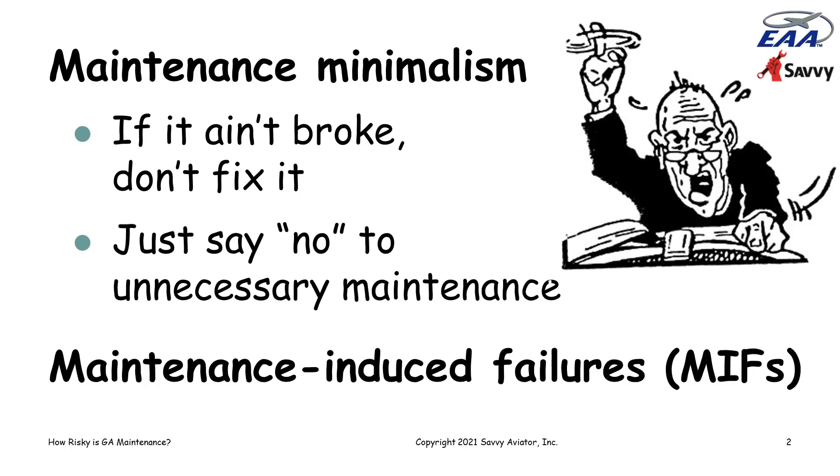But the question always comes up: just how risky is maintenance? How often do maintenance-induced failures occur? How often do they cause accidents? How serious are the consequences? And there have been a lot of studies on this, and over the years I've sort of wet my finger, stuck it up in the air, kind of averaged all the things that I've read, and come up with the

following general breakdown: accidents are roughly 75% caused by the pilot, about 12.5%, about 1/8, caused by the machine, and about another 1/8 caused by something that a mechanic did or failed to do that caused the accident. These are very rough ballpark numbers that I've come up with over the years.

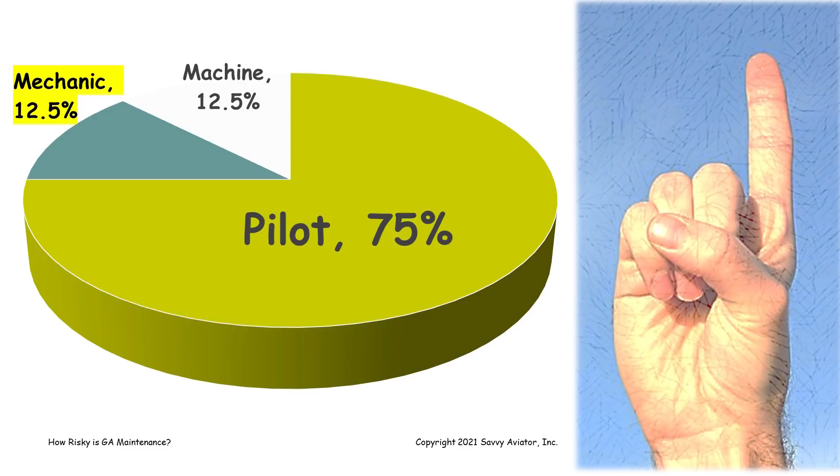But I was cleaning my office the other day, and I ran across an old study. It was actually published in 2002, that a group of FAA people down in Oklahoma City did, that related to this question of just how risky maintenance is in general aviation and what the consequences of maintenance failures are.

This group of FAA analysts analyzed 10 years worth of NTSB accident reports involving general aviation accidents in the decade 1988 to 1997. It was some time ago, but not a whole lot's changed since then, so the things that they came up with are still pretty valid today, I think. They looked at NTSB accident reports that had at least one maintenance-related issue listed as either the probable cause of the accident or a contributing factor.

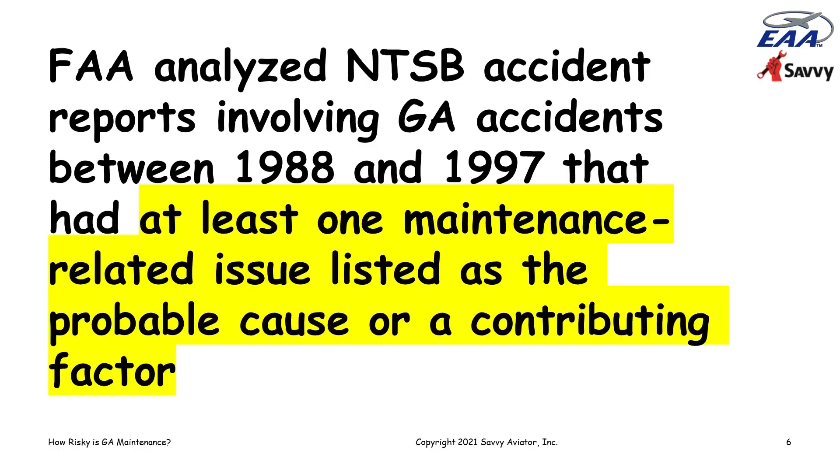And what they found during that 10-year period was that there were a total of 20,884 general aviation accidents, and that 7.1% of those, 1,474 accidents, reported at least one maintenance-related error as the primary cause or a contributing factor. So keep that number in mind, 7.1%. That's a little lower than the 12.5% ballpark number that I usually quote, but we'll talk about that in a bit.

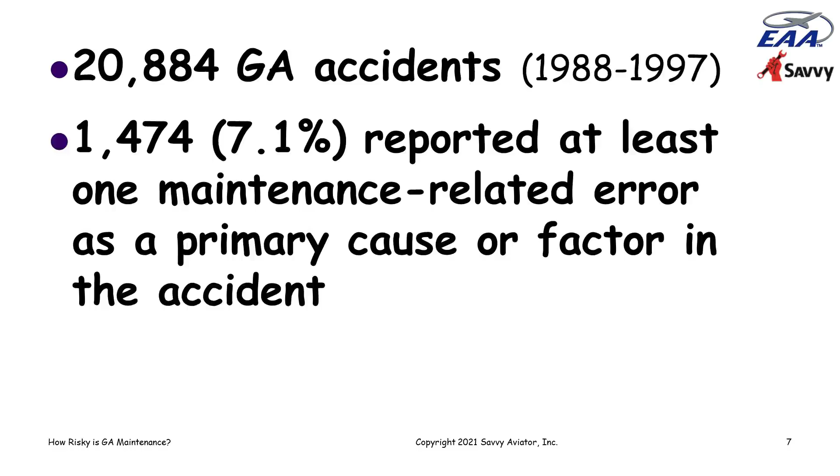Of those 1,474 maintenance-involved accidents over 10 years, which would be like 147 or 148 accidents per year, 18% of them involved fatalities. And of course, a lot of accidents have more than one fatality. In this 10-year period, there were 504 fatalities attributed to maintenance-related accidents. So something like 50 fatalities per year. So it's pretty significant.

Of those maintenance-induced accidents, 86% involved airplanes, 12% involved helicopters, 2% involved other kinds of aircraft, lighter than air, gliders and stuff like that. And that's a little bit interesting because a whole lot more than 86% of the accidents of the fleet were airplanes. So it turned out the helicopters actually had a significantly higher maintenance risk because helicopters are just inherently more maintenance intensive than airplanes.

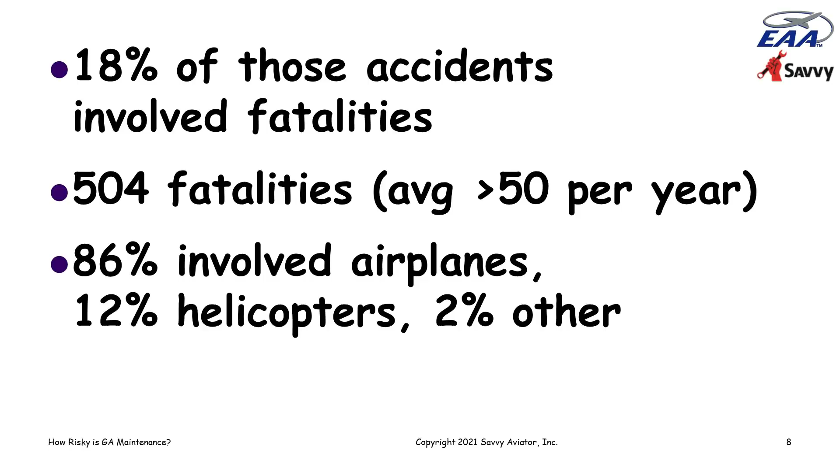Now, one of the peculiar things about this study, something that affected the outcome, I think, and the FAA analysts thought as well, was the fact that the NTSB has this very puzzling way of categorizing maintenance-related accident causes. They have a taxonomy that consists of this set of categories, so that when they report on an accident with some sort of maintenance component, they will classify it as one or more of these categories.

The thing that's strange is that these categories are a bit puzzling. For example, there's a category called design change, but there's another category called major alteration. And it's not exactly clear what the difference between a design change and a major alteration is.

There's a category of annual inspection and there's a category of maintenance inspection. Well, I'm not exactly sure what a maintenance inspection is. Is it some inspection other than an annual? It's a little unclear. There's a category that's just called maintenance, which sounds like maybe some sort of a catch-all category that they throw stuff in when they can't figure out anything else to categorize. But it's a bit strange.

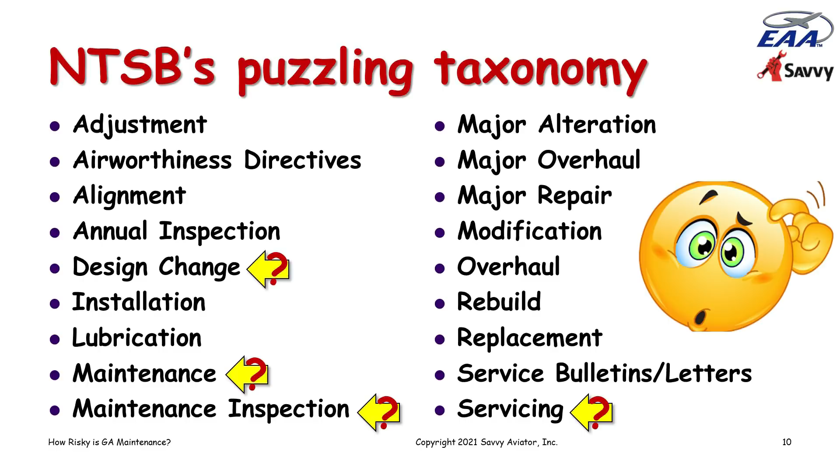But at any rate, it is a puzzling way of categorizing things, and it probably affected the outcome of this study. But the FAA was sort of stuck analyzing the accidents based on the way the NTSB categorized them. And when it looked at that categorization, the most frequent category for maintenance-related accidents was the category called installation. Installation was cited in 20% of the maintenance-related accidents.

The two inspection categories came next: maintenance inspection, whatever exactly that is, and annual inspection, which I guess we sort of know what that is, at 14 and 8%. So the two inspection categories combined, then a category called maintenance, and then all of those other categories that were listed came in at under 5%.

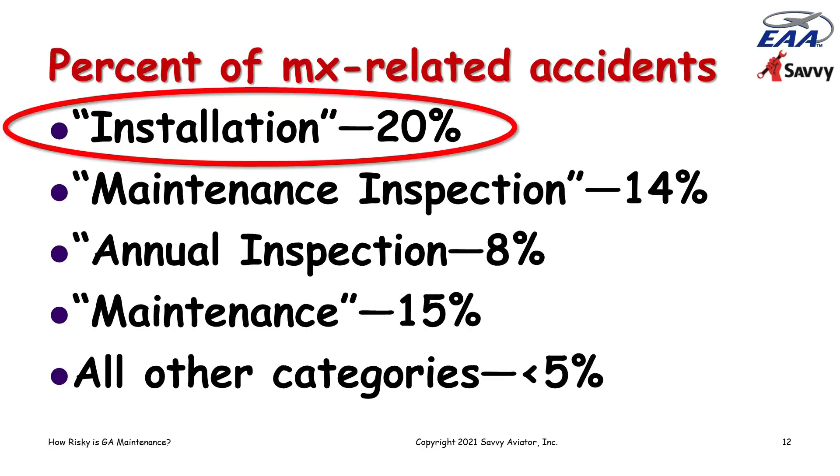So because installation was the most cited category of maintenance error in these accidents, the FAA analysts drilled down a little bit in this installation area to see what they could find out about it. And it turned out that these accidents that were attributed to installation errors were not only the most frequent cause of accidents, but they also had the most severe consequences, with 59% of the accidents attributed to installation errors resulting in injuries, fatalities, or both.

When they looked at the different parts of the airplane that were involved in these installation error accidents, the most frequent by far was power plant, with 56% of the installation error accidents involving power plant. And although they don't say this, the information really isn't available, my guess is that a big part of those power plant installation accidents involved installation of cylinders, because that's the most commonly invasive kind of installation that gets done on power plants. Flight controls came in next at 13%, landing gear at 10%, rotor system on rotorcraft at 10%, and electrical at 5%. So that has to do with how frequently these various parts of the aircraft were involved in installation-related maintenance-induced failures. And again, power plant came in as the leader.

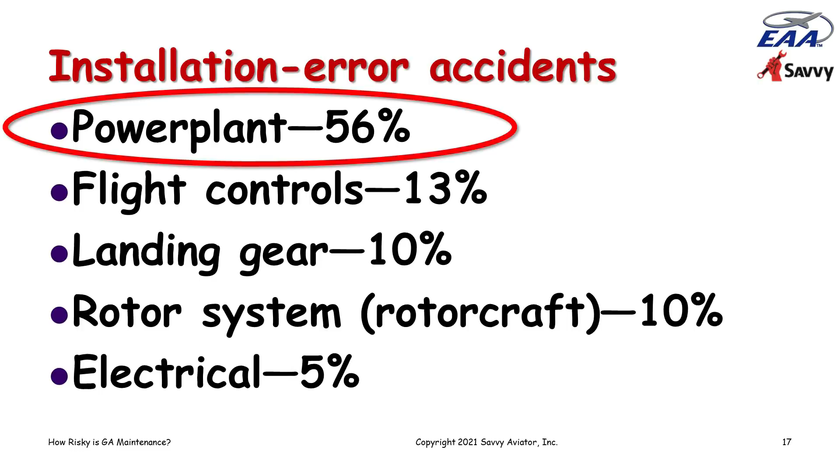Then they classified the types of installation errors. And again, I'm not sure this gave a great deal of insight, but the way the NTSB categorized this is 29% were incorrect attachment, 22% were incorrect connection, 22% were omissions, 17% wrong part installed, and 10% part installed backwards, which is sort of interesting.

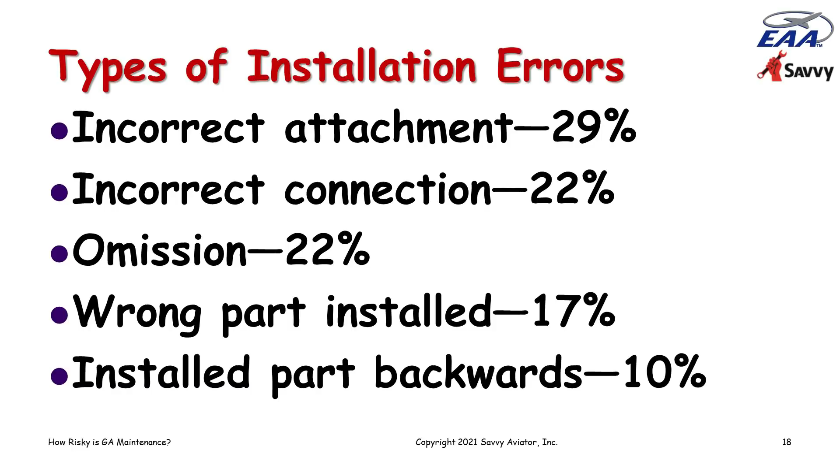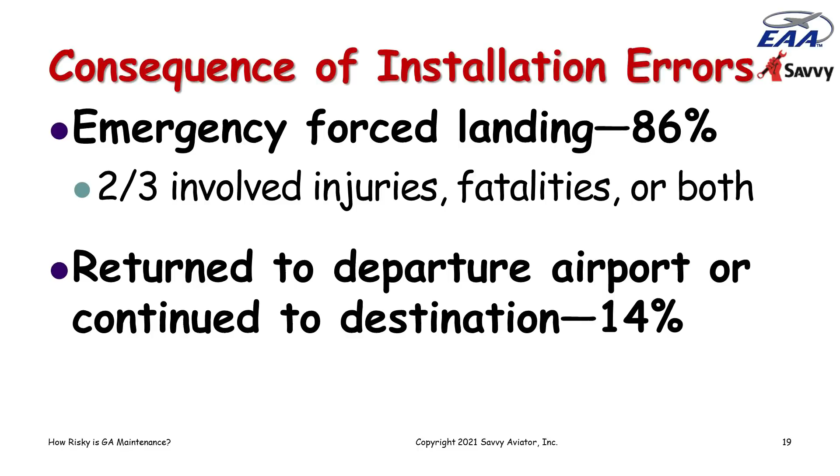When we look at the consequences of installation errors, 86% of those accidents involved an emergency forced landing someplace other than an airport, and two-thirds of those emergency landings resulted in injuries, fatalities, or both. Only 14% of the accidents involving installation errors either got back to the departure airport or made it to the destination. So if you have an installation error related accident, you're very likely to wind up off airport and very likely to get hurt.

When they looked at the likelihood of injury or death in these various things, it was interesting and a little surprising, I think. The likelihood of injury or death in an electrical maintenance-induced failure was 73%.

I wouldn't have guessed that electrical would be near the top. I would have guessed things like flight controls would be near the top, but apparently there must have been electrical fires or electrical failures at night or something that was pretty severe to cause these accidents that involved injury or death. But right behind electrical were flight controls, which you sort of expect that an error in installing flight controls is likely to be pretty serious.

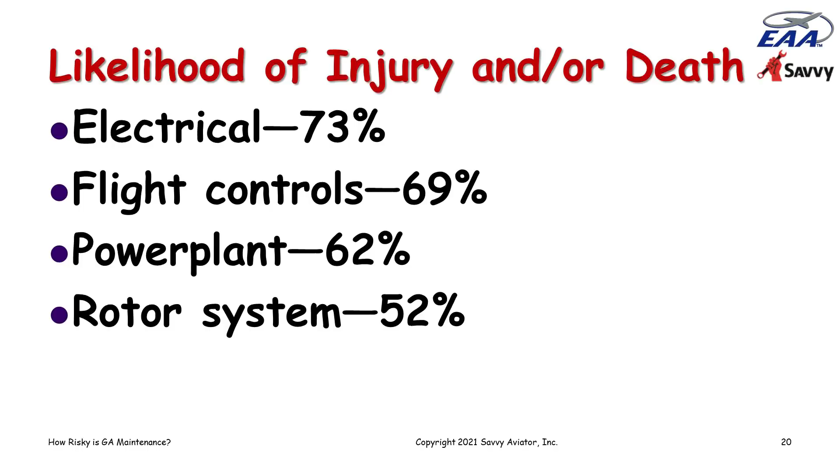Power plant came in right behind that at 62%, and improper installation of the rotor system on rotorcraft came in at 52%. After looking at all of this stuff and crunching all these numbers, the end of this report involved a discussion section in which the FAA analysts tried to make sense of all these numbers, and they sort of came to the conclusion that the risk involved in GA maintenance was probably greater than this analysis of the NTSB data showed.

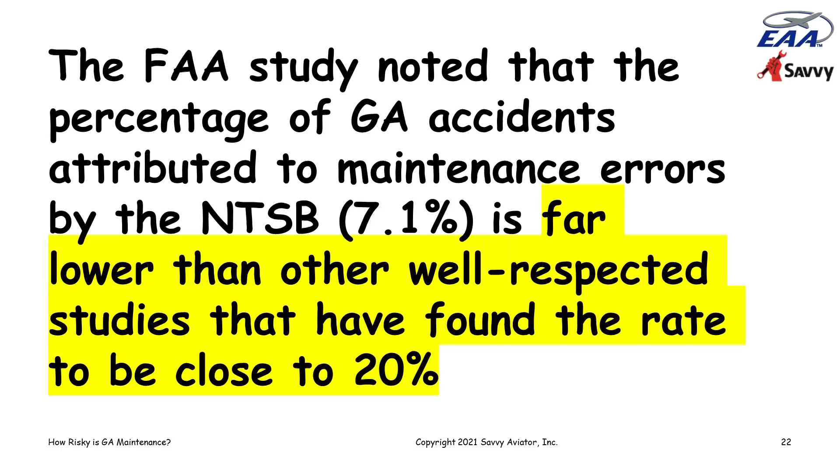They noted that this 7.1% figure, which was the number of GA accidents that the NTSB attributed to maintenance errors, was much lower than most of the other studies that have been done in this area, many of which found the rate to be closer to 20%. And the FAA attributed this to NTSB's rather peculiar methodology of codifying aircraft accident causes and contributing factors, that taxonomy we were looking at before, in a way that the FAA analysts felt often failed to assign a maintenance-related code to accidents that actually were maintenance related.

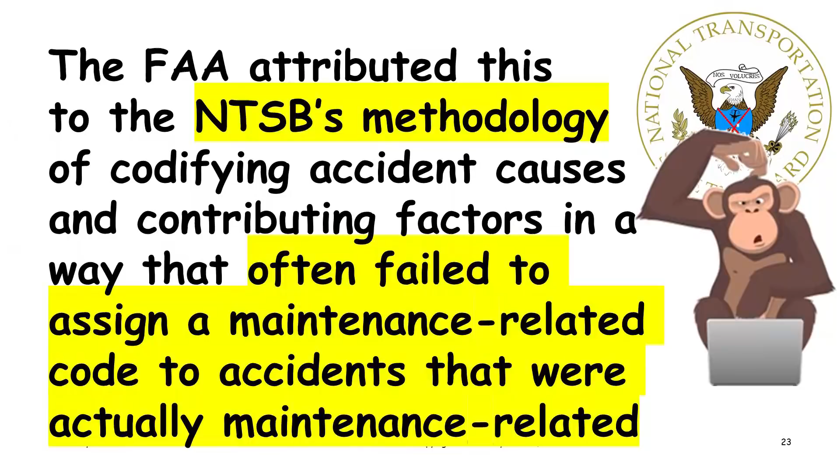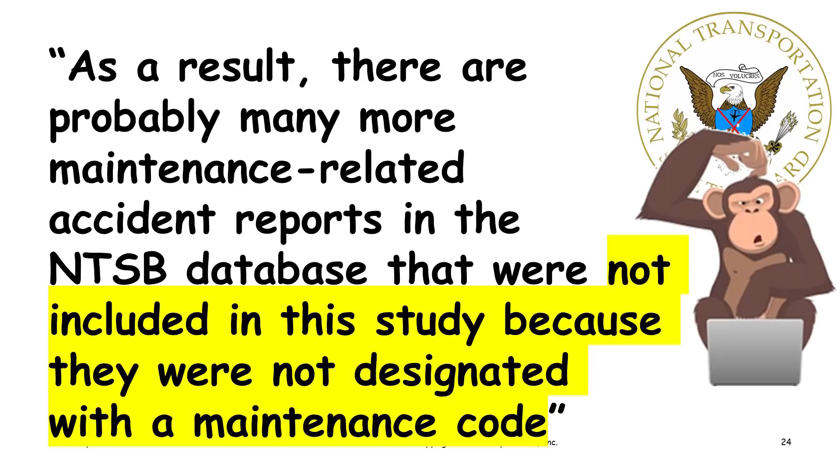So the FAA analysts felt that the NTSB's weird coding method resulted in underreporting of maintenance-induced failures in the accident. And again, quoting from the FAA analysts, as a result, there are probably many more maintenance-related reports in the NTSB database that were not included in the study because they were not designated with a maintenance code.

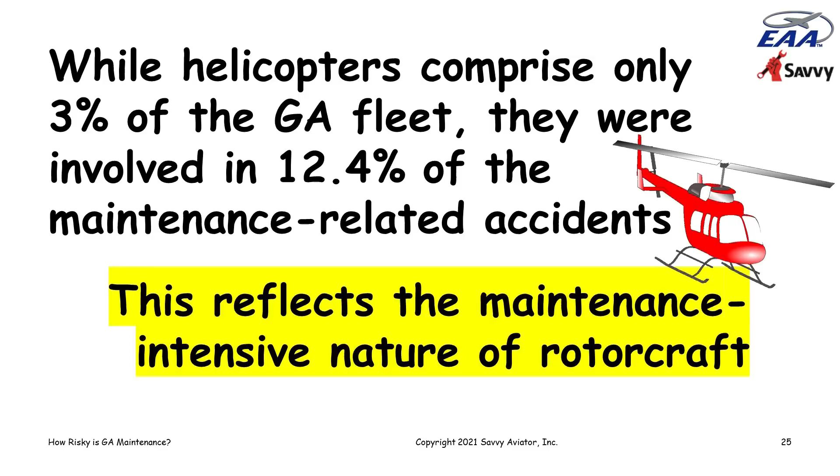Again, as I mentioned earlier, while helicopters comprise only 3% of the GA fleet, they were involved in 12.4% of the maintenance-related accidents because helicopters are inherently more maintenance intensive than airplanes. And so the rate of maintenance error is likely to be much higher just because there's a lot more maintenance done. So there's going to be a lot more errors. But the study indicated that the kinds of maintenance errors made on helicopters were not very different than the kinds that afflicted airplanes. It was just that helicopters got so much more maintenance that the incidence of error was higher.

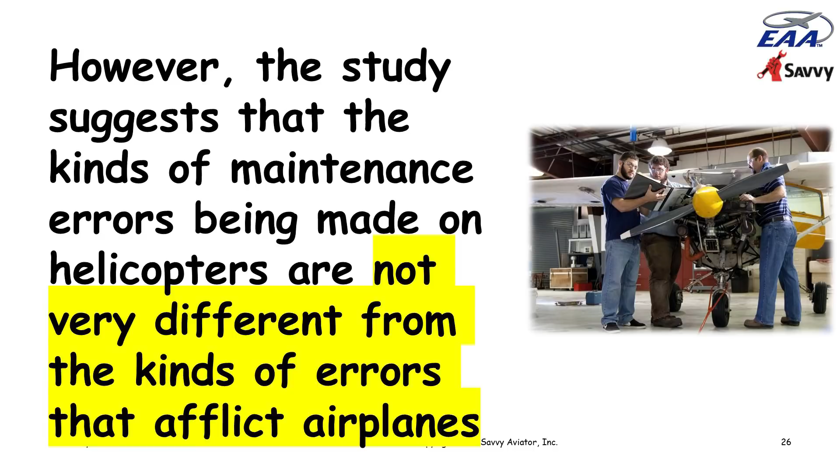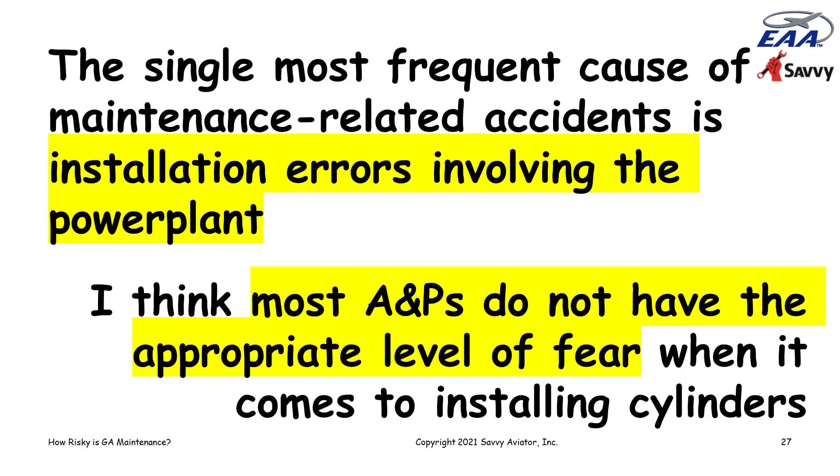As we saw, the single most frequent cause of maintenance-related accidents were installation errors involving the power plant. And I've talked many times about the risk of cylinder work in the field and the fact that I feel that most A&Ps don't have an appropriate level of fear, if you will, when it comes to installing cylinders, because it is risky business. The FAA said it more diplomatically than I usually say it, but they said it seems reasonable to develop guidance to aid maintainers on the inherent risks of maintaining various general aviation aircraft. These guidelines could be empirically developed, informed by accident and event data.

Translating that into plain English, the FAA analyst felt that analysis of what sort of maintenance-induced errors occur and what their consequences are ought to be fed back to mechanics so that mechanics have a better understanding of the risks involved in the stuff that they do. The fact that they do it every day tends to make them very complacent about it. Mechanics change a lot of cylinders, and so they don't think all that much about the fact that changing cylinders is risky business. And there really isn't any guidance to mechanics right now that indicates to them just how risky it is, or to aircraft owners for that matter. And the FAA analysts who wrote this report felt that there ought to be.

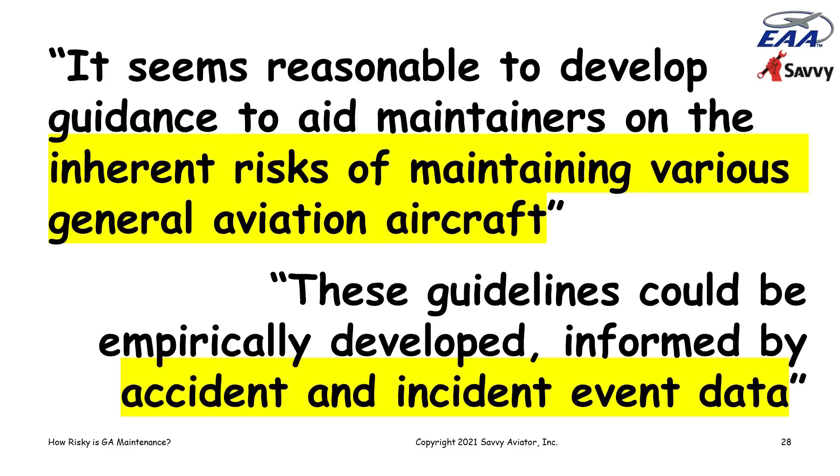Then there was an interesting discussion at the end of the report, which I am titling "Will A&Ps Confess Their Sins?" The issue there that the FAA analyst brought up was the fact that our current GA maintenance culture is rather unlike, for example, the pilot culture. Pilots tend to talk about accident causes all the time. We tend to be accident report junkies. We read about aircraft accidents. We talk about aircraft accidents, because we feel like the more transparency we give this subject, the better we are going to be prepared to deal with problems when they occur to us.

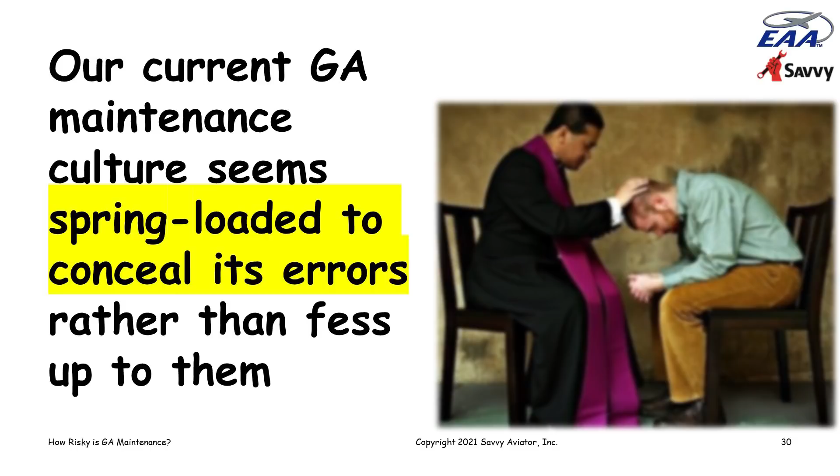The maintenance culture seems to be quite different than that. They don't talk about maintenance-induced failures. It's not a subject that really is ever talked about among mechanics. And to quote the FAA analysts, nearly every mechanical failure is investigated and archived so that the failure rate of a specific type of component can be analyzed and precisely tracked. This is talking about failures of the machine.

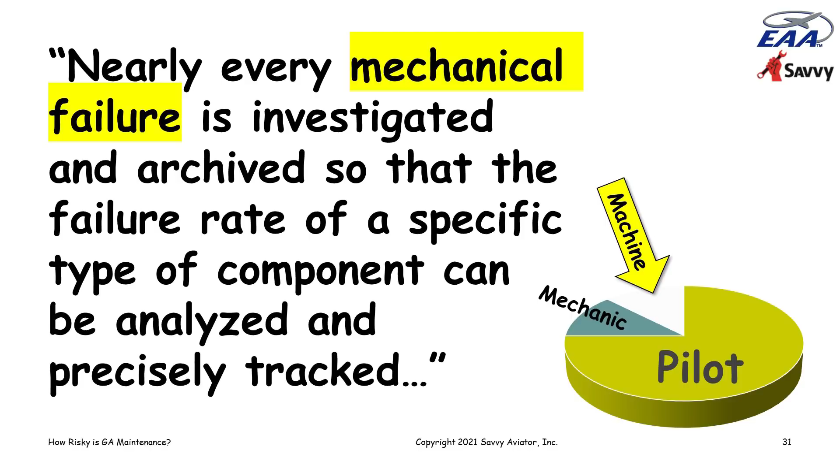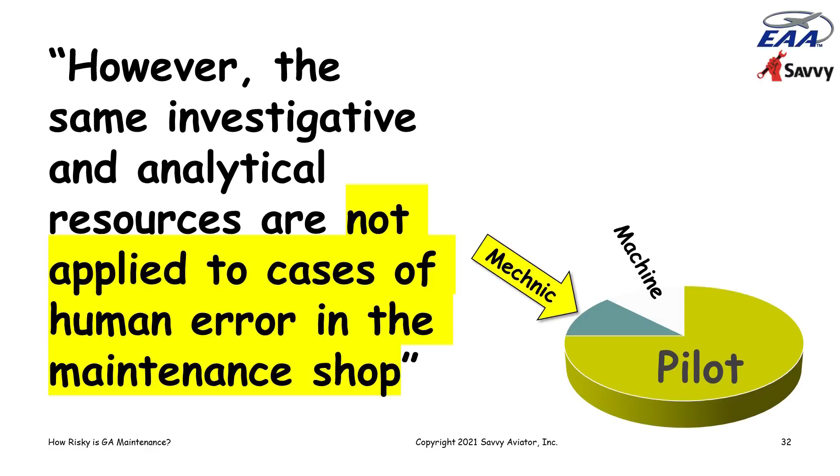We have SDRs, we have ADs that get issued. When machines fail, there's a lot of remedial action that takes place. A lot of attention is paid to it. But the FAA analysts go on to say, however, the same investigative and analytical resources are not applied to cases of human error in the maintenance shop.

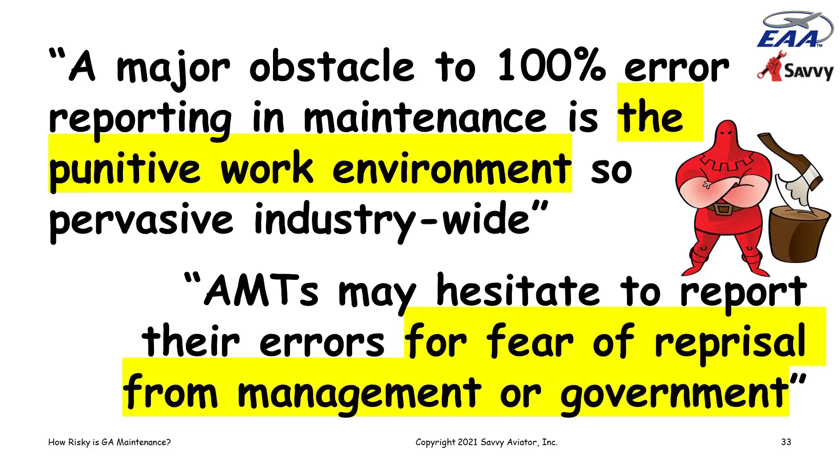Talking about the maintenance-induced failures: a major obstacle to 100% error reporting in maintenance is the punitive work environment so pervasive industry-wide. AMTs may hesitate to report their errors for fear of reprisal from management or government. Kind of interesting. And they go on to say, therefore, any maintenance error reporting system will likely require some level of immunity to disciplinary action in order to be successful.

Now, we already have a system that provides some level of immunity to disciplinary action, and it's called the Aviation Safety Reporting System. Pilots file ASRS reports all the time, and we're sort of trained that when we screw up, one of the first things we do is file an ASRS report because unless it was an intentional error, if it was an inadvertent one, filing a timely ASRS report gives us sanction immunity from the mistake that we made. And so pilots are pretty spring-loaded to file these reports.

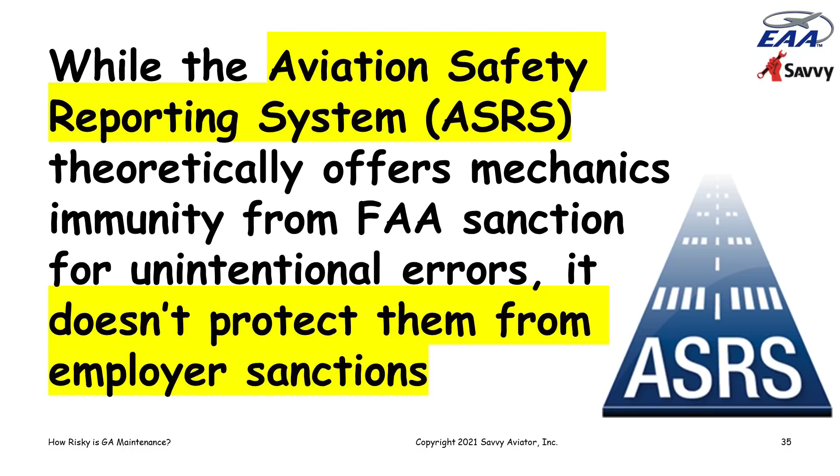Mechanics can file ASRS reports too, but they don't do it very often. And of course, one of the problems with ASRS reports is that although it provides us immunity from sanction by the FAA, it doesn't provide protection from sanctions from the employer. So if a mechanic is worried about being violated by the FAA, an ASRS report would help. But if he's worried about getting fired, an ASRS report is not going to help that. And it turns out that ASRS reports are very rarely filed by mechanics.

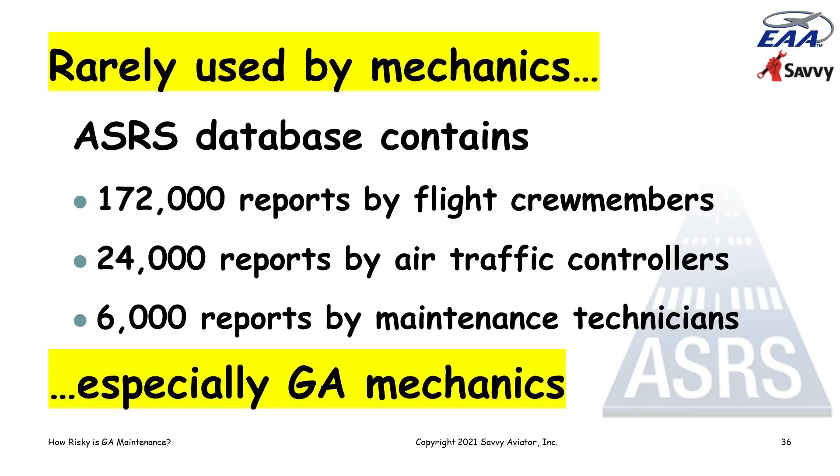The recent count in the ASRS database contains 172,000 reports by flight crew members, 24,000 reports by air traffic controllers, only 6,000 reports by maintenance technicians. And I would be willing to bet you dollars to donuts that the vast majority of those 6,000 reports by maintenance technicians came from mechanics in the airline industry, not general aviation mechanics. It's just very, very rare that a GA mechanic will file an ASRS report. So it's really not a system that is used by them or that provides the kind of immunity that they would need to be, honestly, admitting to their mistakes.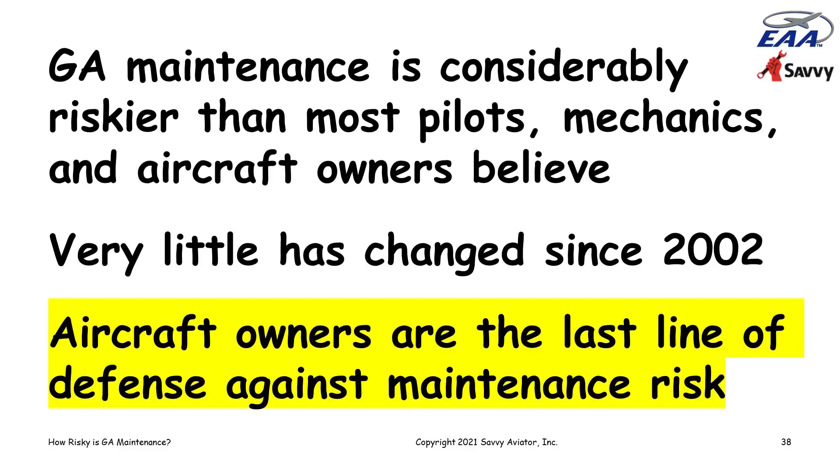What can aircraft owners do? Well, one thing we can do is say no to risky or invasive maintenance unless it's absolutely unavoidable. If a mechanic says we need to change a cylinder, you should be asking a lot of questions before you agree to having him change a cylinder. Because it's like, if a doctor says we're going to have to do an open surgical procedure on you, it would be very smart to ask a lot of questions about it and about what the risks are, maybe get a second opinion, because surgery is inherently risky, and it's not something we want to do unless there's a really compelling reason to do it.

And if it turns out that it's necessary, we should be hiring the most experienced and talented specialists to do this risky work that we possibly can. A lot of this risky work really shouldn't be done by your typical A&P mechanic in the field. It should be done by somebody who specializes in this work. So if it's taking an engine apart, it would be really nice if it was an engine specialist who was doing it.

And finally, aircraft owners should always be religious about doing a post-maintenance test flight before carrying passengers or making cross-country flights, particularly in IMC or over rough terrain. And owners have to understand that the first flight or few flights after maintenance, particularly if it's invasive maintenance, is the most likely time that the airplane is going to have a mechanical failure.

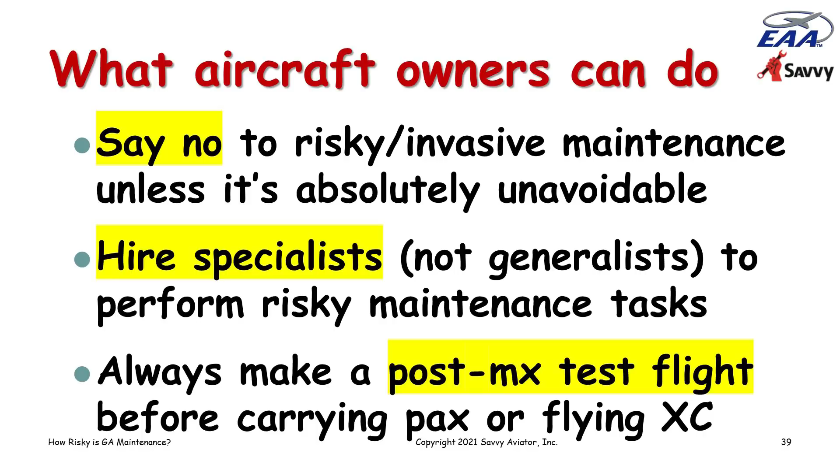And I do my own maintenance, and I have a lot of faith in my own abilities to do good maintenance. But every mechanic, even the best mechanics, make mistakes. We're human, and the post-maintenance test flight is sort of your last line of defense against those failures. And I have done a webinar specifically on that subject of the post-maintenance test flight and what we should go through. So, Tim, that's all the material I have, but hopefully this is interesting enough that maybe we can have some discussion about it.

All right, Mike. Yes, very much so. We got many questions already so far. Let's jump in first. Jesse just wanted to know, what's an AN cap?

Oh, well, the fuel fittings on most aircraft are AN fittings that are where lines and hoses connect together. There'll be T fittings and various things, and a cap is simply something that caps off a port, an AN port in a fuel system, and frequently there are ports like that you open to connect, say, a gauge for adjusting the fuel system or something, and then when you're done making that adjustment, you disconnect the gauge and you cap off the port with an AN cap.

And of course, if that cap comes off, then fuel's going to start escaping out of the system, and that's not going to be a good thing. So that's apparently what happened in the case of the Cirrus crash. I don't really know a lot of the details about that Cirrus crash, except that the NTSB report indicated that an AN cap came loose, and it was shortly after maintenance that involved the fuel system.

Drew comments that there was a recent Piper wing spar AD that now calls out reinstallation of a chamfered washer being an issue. Mm-hmm. Maybe that's one of those installed it backwards cases that they were talking about. I'm not sure. Sounds like it.